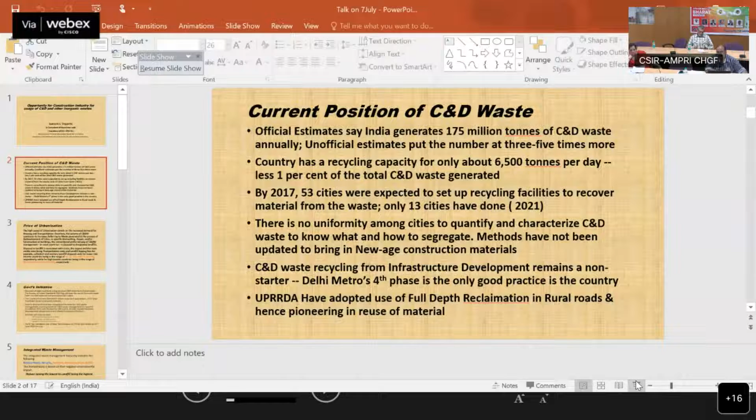Please stop your share of that presentation and share it again. Okay. And now put it in slideshow mode, sir. Now is it okay? Yes, it's visible. Okay, sorry for the inconvenience.

So I was saying that Delhi Metro has been very effectively using this C&D waste. Now in UP, when we come to rural development, this authority has used full depth reclamation in the rural roads, pioneering the reuse of material.

Now, as a price of urbanization, when you are urbanizing a city, there is a lot of dismantling going on, redevelopment of cities, repairs and other things going on. And most of it is going into designated landfills.

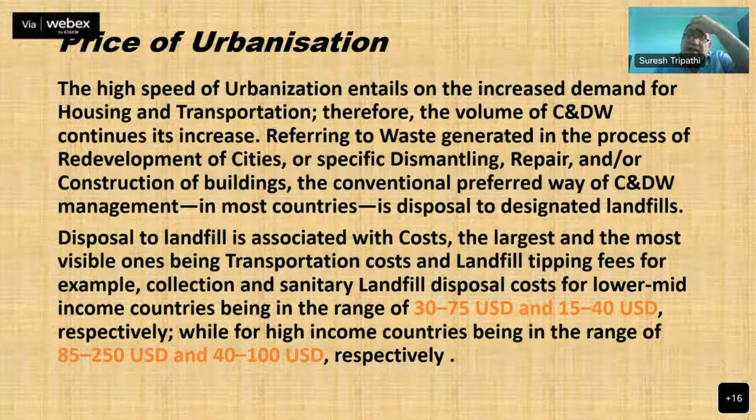The disposal in landfill also has an associated cost. If you see the transportation cost and landfilling tipping, the land itself costs around $75 in low and middle income countries, or around 100 USD in higher income ones.

Coming to government initiatives, earlier there were a lot of hurdles in usage of C&D waste, and the Bureau of Indian Standards has allowed use of concrete from recycled material from C&D waste. But I still find that when it comes to actual implementation, the specifications do not allow use of these...

...C&D waste, and there is a lot of awareness which has to be created among all the stakeholders for use of this C&D waste.

Swachh Bharat Abhiyan has also recognized C&D waste, and in the Swachh Sarvekshan, cities have already specified how C&D waste will be collected and notified.

Another thing is that NHAI has also mandated use of new technologies like cement treated base for around 10% length, in a 2nd June 2022 circular.

So at the government level, a lot of initiatives are being taken, and this initiative is also on the same line as AMPRI.

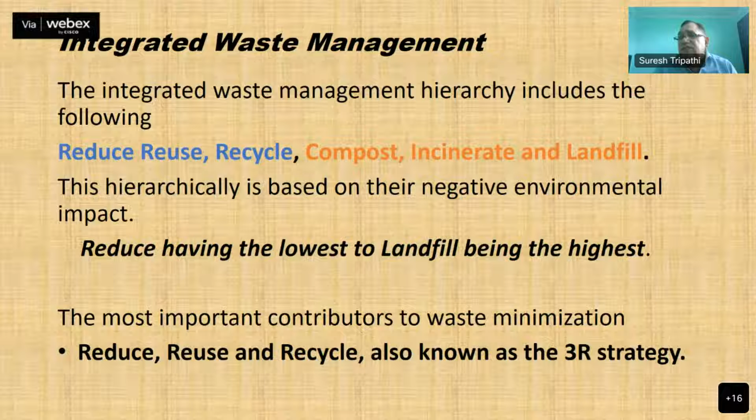Reducing has the lowest negative impact, and landfill has the highest negative impact to the environment. The most important contributors to waste minimization are reduce, reuse, recycle. This is called 3R strategy, which in the construction industry should be made mandatory.

Now, when you look into typical construction companies' waste composition, you will find that there is 60% potentially reusable/recyclable material which is inert material, non-inert waste is around 35%, and only 5% normally needs to be disposed to landfill.

Inert waste in this context specifically refers to physical material or items that are not undergoing any significant physical, chemical, or biological transformation, but not including any hazardous or green material.

Although 95% of C&D waste is potentially reusable, most of it currently goes into landfill, especially the high quality inert waste, which is more than half of the generated waste, indicating great potential for reuse. Understanding this would eventually not only reduce the cost of C&D management, but also contribute to construction company revenue and increased reputation.

Now, an opportunity to practice based on the reduce strategy. If your first goal is reducing, the best way to reduce waste is not to produce it in the first place, so ideally this starts at the design stage itself. The case history of many projects shows that improper design has led to a lot of waste generation and excessive cutoff. The design stage usually requires a comprehensive, conscious, and innovative approach.

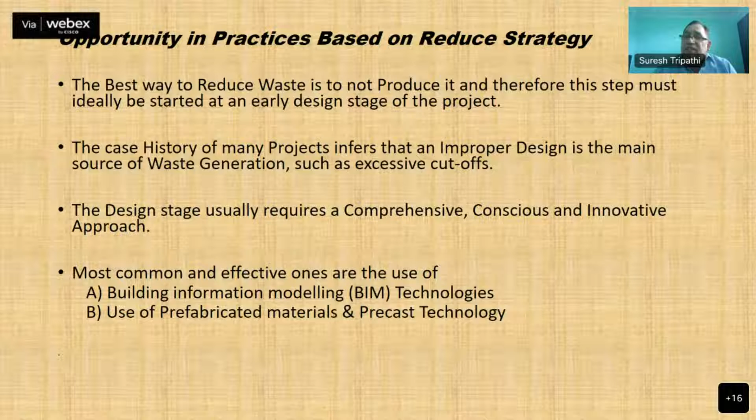One of the most common and effective methods is adopting Building Information Modelling technology, that is BIM technologies, and the next is use of prefabricated or precast technology. Based on my experience, especially since I've been in the precast field for the last 10 years, we have been adopting BIM from the design stage itself.

BIM technologies comprise the digital modeling of the building, containing all technicalities - geometric, quantity, character - and material functions like scheduling, cost, and resources. If we mandate the construction industry to adopt BIM technologies, that will significantly reduce our waste. Also, these days for steel, we are getting pre-cut steel available from the manufacturers, which also reduces wastage.

There is a study which has shown that through use of BIM technologies, we can reduce waste by around 15%.

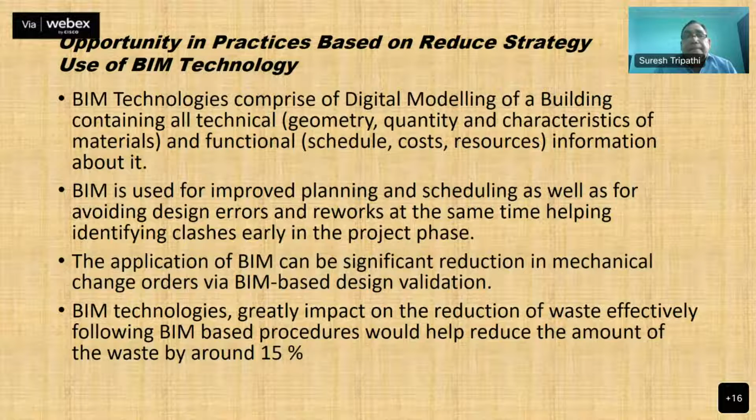Now, taking into consideration prefab and precast technologies for the construction industry, adopting prefabricated material of construction, known as IBS, involves material manufactured off-site. Compared to the conventional use of raw material for on-site component production, fabrication in factories leads to a considerable reduction in losses.

I have been managing a lot of precast factories, and there we absolutely don't allow any wastage. We also recycle all the waste that comes out - aggregate, we crush it up and reuse it. We use up to around 1% of all the waste and reuse it into the concrete.

When you look at prefabricated material, there are precast buildings, precast facades, staircases, partitions, bathroom pods, balconies, and PT slabs, hollow core - all these are components and other building materials.

The government has also mandated that around 15%, especially in road construction, the precast technology should be propagated. The quantitative advantage of using prefabricated material has been studied, and it has been estimated that it replaces around 70% of the finishing work on site, reduces waste associated with timber by around 74 to 87%, and waste associated with concrete by around 50%.

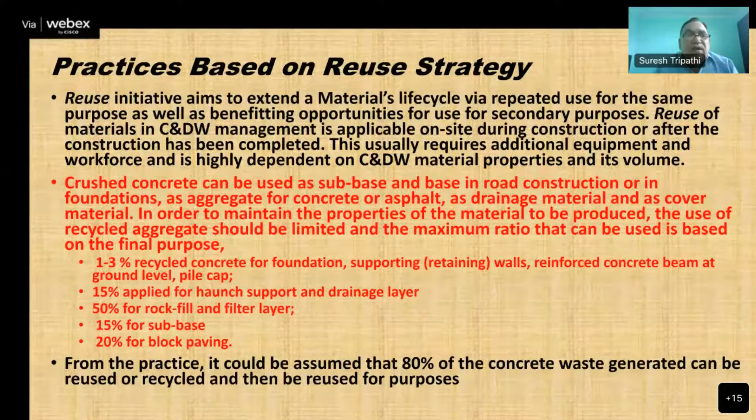Crushed concrete can be used as sub-base for road construction, and as aggregates for concrete or asphalt, or as a drainage material. It has been seen that around 1 to 3% recycled concrete can be used in the foundation, retaining wall, reinforced concrete beam, ground level, and pile cap.

Around 15% can be applied in haunch and drainage layer, 50% in rock fill and filter layer, 15% in sub-base, and 20% in block paving. From practice, it can be assumed that around 80% of the concrete waste generated can be reused or recycled for these purposes.

Now, these days we have also brought in a new technology for innovative use, in which we stabilize soil or waste material having more silica content. We stabilize that using Novocrete. Novocrete is also an additive which is used in ordinary cement.

This is a non-toxic, non-detrimental, environment-friendly material, and it is an innovative way of making roads, yards, hard stands, and stabilizing using existing soil, without excavation and disposal, soil replacement, recycled aggregate, or even asphalt or concrete. This technology is very useful for road, rail, yard, or hard stand area construction.

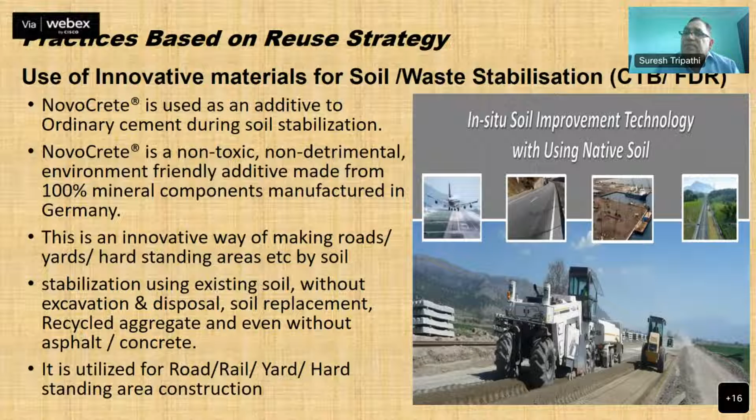Now in UP, a lot of rural roads are being upgraded, and the same material which is there in the road is being recycled and used there itself, so no further additional material is brought from outside. UP has been a pioneer in adopting that technology, and this is to be scaled up and taken all over India. And again, this is Novocrete.

It is mixed with soil, and you can just see when you compare the thing, in normal conventional methods you have to go a minimum of around 80 centimeter depth, and with Novocrete, around one-third of that, you can do the reclaiming.

Now, on the basis of reuse strategy, the gypsum drywalls which are coming up also have a lot of alternative uses. This can be recycled and used effectively as a compost additive for materials with low levels of sulfur and calcium nutrition. Gypsum increases the level of calcium in compost and helps in neutralizing the acidity that might be present in the compost mixture.

So using gypsum as an additive requires a higher need of effective monitoring.

Actually, all these technologies which are being used, like the soils, this Novocrete, or this gypsum, require a lot of knowledge about how the soil is behaving, geotechnical knowledge, and how the material will be reacting. So this also paves the way for new generation scientists who can do research and reduce the quantity of usage and effectively use these technologies.

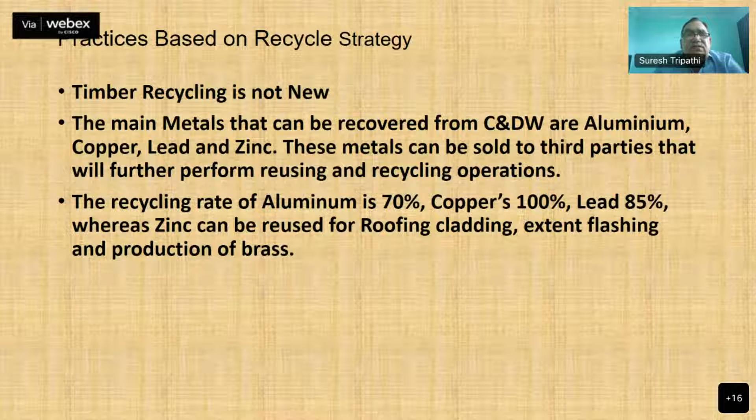And recycling is a popular one, which I don't want to elaborate on much here, because our main theme is usage. So timber recycling, metal has been recycled.

So for me, I just want to say that this initiative of AMPRI is very good, and we'll be listening to others. And I hope that my brief experience of the construction industry and the utilization we are doing will be helpful for the others. Thank you very much. If any question is there, I can answer that.

Yeah, I will have some. Thanks, Tripathi sir, for giving an elaborated talk on these particular opportunities for construction industries for use of C&D and other inorganic waste. I have some questions. Maybe Dr. Ashokan, if you permit, is having some questions. Yeah, you can unshare your presentation, sir. That's fine. Yeah, thank you very much, sir.

Thank you very much for your very exciting information about the C&D waste. Actually, C&D waste is going to be a future challenge to a country like India, and it is a great learning for us. When we were estimating the quantity, almost 175 million tons of C&D waste is generated in India. When we consider the total waste itself, about 1 billion tons, organic waste may be about 50%, and inorganic waste the remaining 50%. Even the municipal solid waste itself looks lower than the construction and demolition waste in the country.

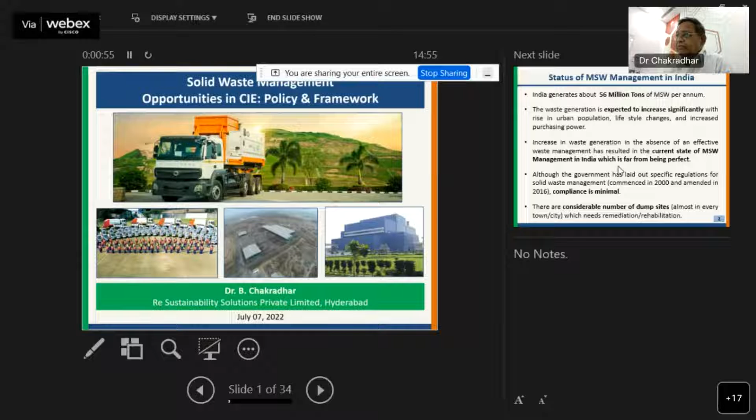The topic is solid waste management opportunities in civil infrastructure, engineering, policy and framework. This is one of the very important areas. If you see these photographs and pictures I've kept, all these activities really badly need civil engineering infrastructure as well as engineers. Without them, we absolutely cannot move forward at all.

I kept this to give a glimpse of what is happening in our country today with solid waste. Around 56 million tons of MSW is expected to be generated, and in subsequent slides you'll see only 36% of treatment is going on, around 65-70% is yet to be done. There are certain policy guidelines - although the government laid out specific regulations for solid waste management commencing in 2000 and subsequently amended 5 years back in 2016, the compliance is minimal. This is one of the toughest topics in the country in waste management.

When you compare with hazardous waste, biomedical waste, or recycling, municipal solid waste is one of the toughest because it is mainly handled by the municipal corporations in each part of this country.

If you see the statistics, our country generates around 1.5 lakh tons per day. For the collection part, we can say 98.4% collection, but the treatment part is only 36%. So you can see the gap. Here itself the importance of civil infrastructure and engineers really shows - there is enormous, endless need, because to cope up the backlog, the number of infrastructure facilities needed in this country is unbelievable. So the topic you people have selected is of top priority today, looking at just one area - waste management of municipal solid waste.

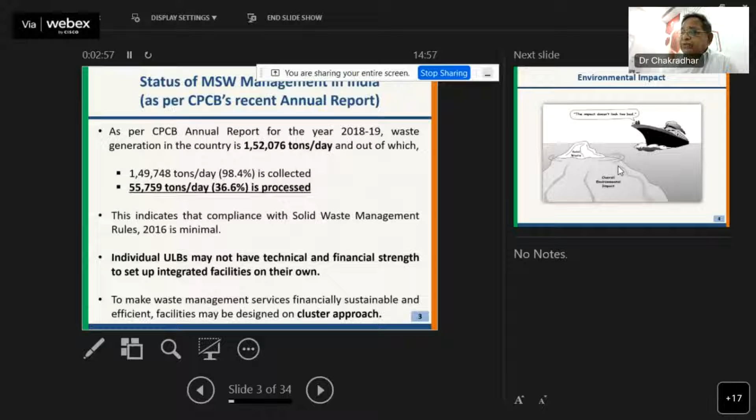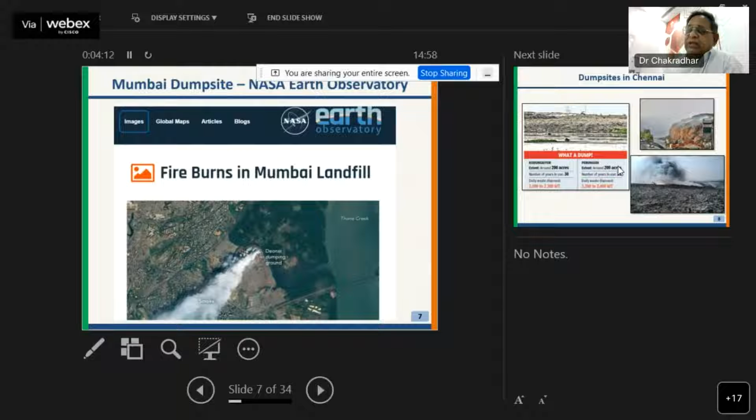This is again a dump site in Deonar, one of the oldest dump sites near Mumbai. What is the real scenario happening? Nearly since 1930 this dump site has been active, and even till now it is active. Recently Ramki has taken up the project of waste to energy here, wanting to establish around an 8 megawatt power plant, for which Mumbai Corporation is working on it.

If you see Chennai, similar scenario - the quantities are enormous, 2,100 to 2,300 metric tons at Kodungaiyur, 2,200 to 2,400 at Perungudi. So the level of lack of civil infrastructure we presently have - well, we do have certain level of things, it's not that we are at zero level. We have definitely improved upon this over the last couple of decades. As soon as in the year 2000, municipal guidelines came, things started initiating, and to some extent we reached a certain level.

But the present scenario is, after looking at how things are happening in the country, what is the need based today? If you see the Rewa level of Madhya Pradesh also, where we are again putting up a waste to energy plant, which will be shortly initiated and activities are already going on - imagine the importance of civil infrastructure and engineers in what you are all discussing. Plenty of scope is available, and endless requirements are needed in this country.

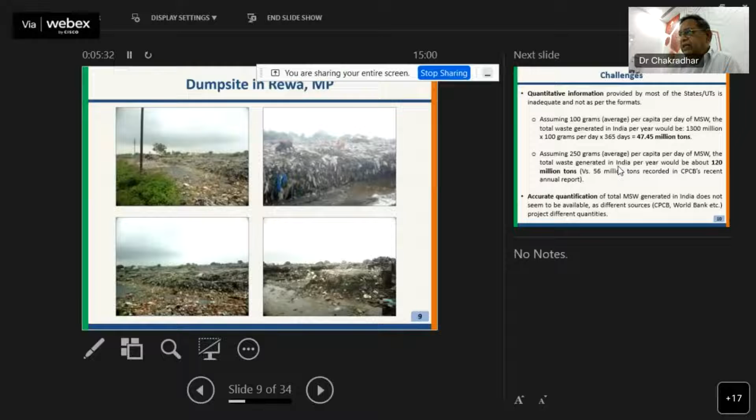If you see the quantitative information, assuming around 100 grams on average per person in the country, we will be generating around 47.45 million tons in a year. If you see 250 grams on average, it goes to around 120 million tons. So the quantification itself is one of the major constraints in our country.

You have CPCB inventorization, you have World Bank inventorization, you have many organizations' inventorizations wherein various types of tonnage will come. But ultimately it's huge, nobody can say exactly on that.

The challenges we are expecting, CPCB observes that most of the dump sites are unscientific. Of course, there's no need of declaring it unscientific, it is 100% unscientific. That's the basic rule. Recent development has come in 2016 with certain modifications.

So landfill sites should preferably be used only for depositing inert material. In fact, new technologies, new opportunities have come today - earlier it was only a dump site, there was no other technology available. That means I'm talking about a decade back or two decades back.

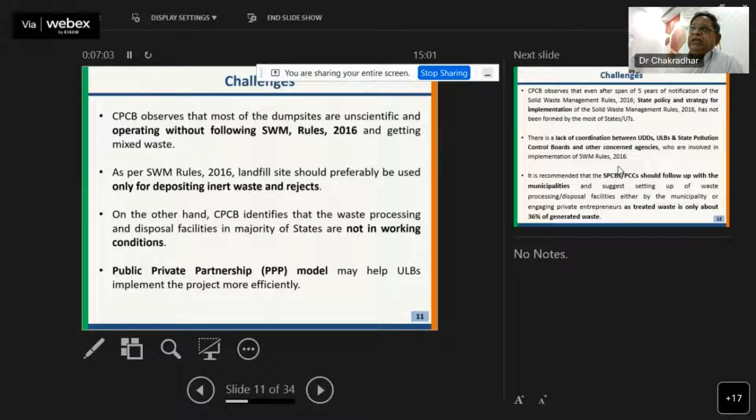But presently many opportunities have come. Public-private partnerships have entered the picture and started entering into new methodologies, which bring different challenges - how exactly in state policy strategies, then lack of coordination between UDD and ULB, state pollution control boards, leads to this sort of situation present.

If you see the last line, treated waste is only about 36% of generated waste. So I just initially mentioned about 36% treatment. So the rest needs enormous infrastructure today, for which the designs, the brainwork of all civil engineers are badly needed. In fact, the recommendations we generally support - site selection is one of the major criteria.

Fundamentally, state policy should support financial issues. Segregation of waste at source, of course this is a fundamental notion from the beginning of waste management rules - segregation at source. But still today, the achievement on this is a real question mark, because we have multi-layers of population, multi-layers of quality of people. So this segregation part is always one of the biggest challenges in our country.

The state UDD should ensure safe disposal of legacy municipal solid waste, because plenty of dump sites are still existing, as I showed in some of the photographs. So one has to convert all these dump sites to treatment facilities. Then only we can really start thinking further.

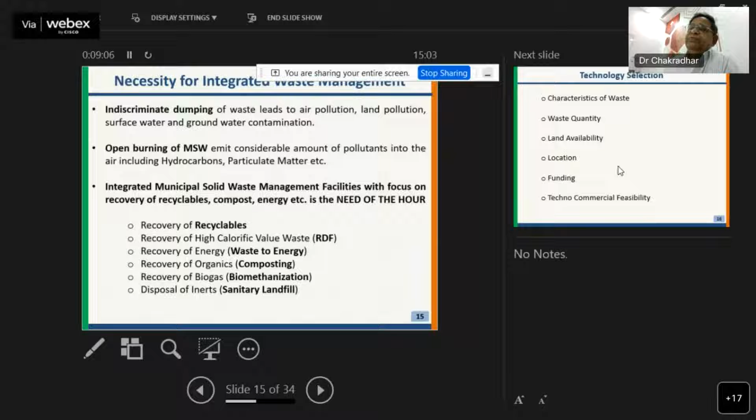That's the basic reason the integrated municipal solid waste management concept has come, which basically covers recovery of recyclables, recovery of RDF - that is refuse derived fuel - waste to energy concept, composting, bio-methanization, sanitary landfills. These concepts are practiced in the country in many areas. It's not that we are not practicing, but there is a lot of improvement needed at each and every level.

In fact, technology selection is one of the criteria where characteristics of the waste, quantity, land availability, location, funding, techno-commercial feasibilities are the basic parameters under technology selection criteria. If you see the collection and transportation, one of the biggest challenges in each aspect - the role of civil engineers and the infrastructure is enormous here.

How exactly the commercial establishments, industrial markets take it, what is the transport mechanism, how exactly it will be segregated, how exactly it will be collected - street sweeping, mechanical sweeping, as well as local transfer stations - is one of the major criteria in urbanized cities. Because you cannot directly take it to long distance dumping sites, wherein local transfer stations will be the easiest way of collecting local municipal solid waste and subsequently transferring it to the dump sites. So this is one collection and transportation mechanism.

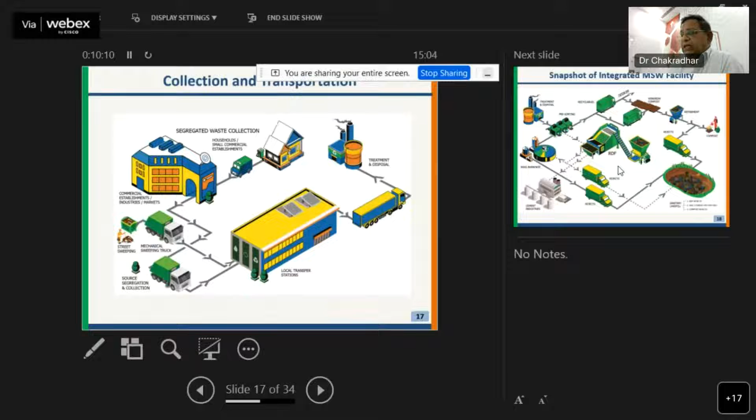Then the MSW facility itself - if you go for MSW facilities, many facilities are needed, this is the concept presently we are adopting. The technology, the methodology adopted is shown here at various levels, and ultimately all the inerts which are segregated go to the landfill. So that is a sanitary landfill site.

Then you have compost mechanism, you have RDF technology we will be making, then mass burn technology for energy. So ultimately rejects, as I mentioned - today RDF is one of the fuels. After preparing RDF with high calorific value, it is today used for waste to energy as well as cement industries. These technology selections, of course, are all the technical things available.

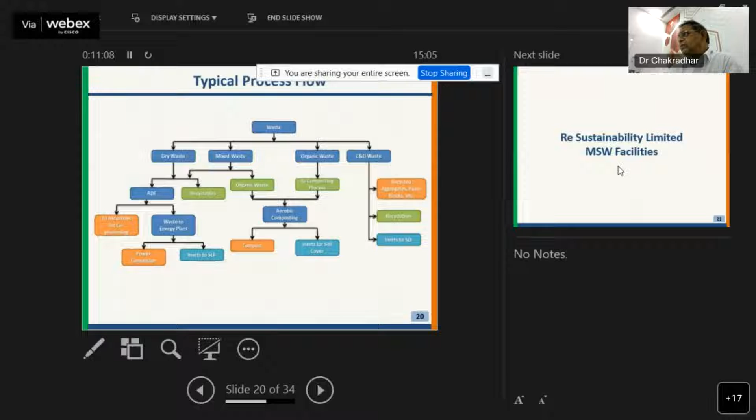Old process flow sheet, as I just showed, I don't want to repeat it again.

Now if you see Hyderabad, one of the key things - around 6,000 to 7,000 tons per day is treated in this location. One of the largest municipal solid waste facilities in the country, I can surely say, because even Delhi, Mumbai, Chennai, Bangalore are all up to the level of 2,000 to 3,000 at multiple stages. But here in Hyderabad, it is only one location, almost covering 6,000 to 7,000 tons.

So this is the facility from a bird's-eye view, what we are making. You see the past site, how exactly it was previously the dump site. After Ramki took up this facility, the change within a decade period shows how the uncontrolled level became a controllable concept. So the present scenario is the bottom one, which is happening.

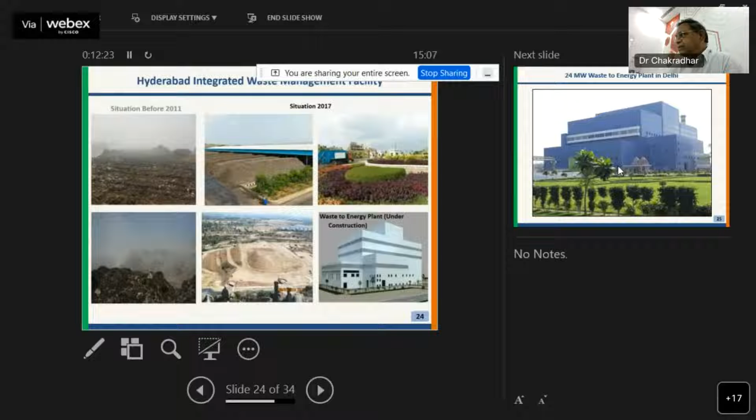If you see the waste facility with all the structures, the entire legacy dump site is totally covered with various technologies. A waste-to-energy plant is also presently working in Hyderabad. This is the Delhi plant, 24 megawatt, presently working, and in Hyderabad also a similar thing is under operation.

So this is the waste-to-energy plant, of course, showing how exactly we convert through mass burn technology, and all the inerts go to the landfill. This is one of the methodologies. As I told, these are the opportunities of MSW.

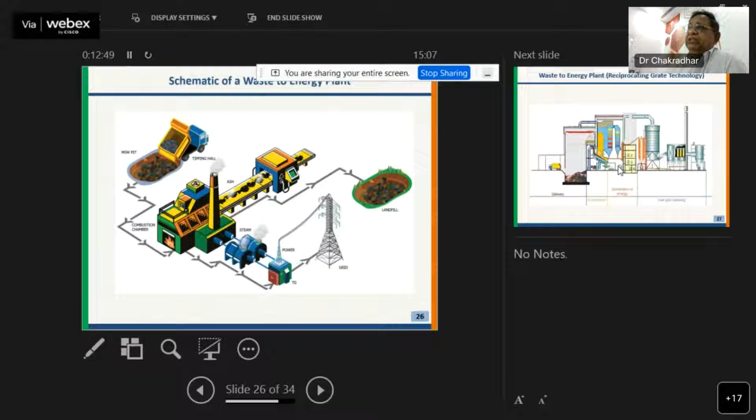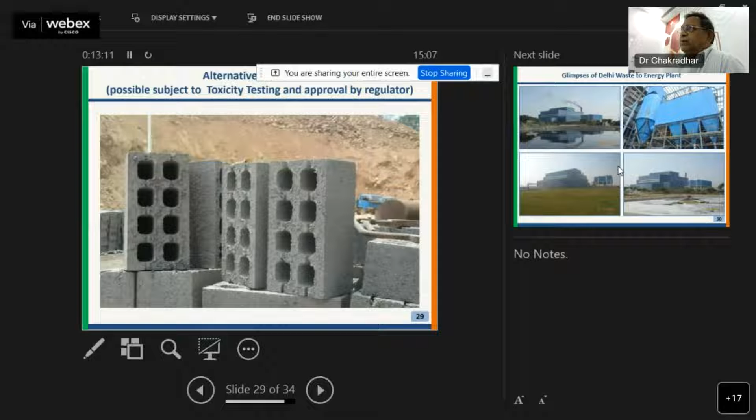If you see this technology and the energy plant, what we have presently working in different places. Now the alternate uses of ash, whatever ash is generated, this is not a new thing, but it is available. So there is an opportunity with the bottom ash which is coming from the power plants.

Now this is the energy plant I showed you, showing how it is working and what type and majority of the MSW directly goes into this particular process. So it reduces the land requirement as well as reduces the landfill area. These are all the different glimpses of the Delhi waste energy plant, how exactly we operate.

So the key to all this success, whatever we are presently talking about, definitely lies with civil infrastructure as well as engineers. The concept of CIE, what you people are making, is really a masterpiece. As per my knowledge, since working in this company for more than 15 years in Ramki, I have seen the importance of civil infrastructure in converting waste management into really usable things. This is the conclusion.

I don't want to go into the details, but 100% collection, 100% processing, disposal as per the rules and guidelines. If you really approach all these guidelines, definitely one day we will reach Swachh Bharat Mission's targets, along with all the inputs from various sectors, engineers, as well as the scientific community coming into this.

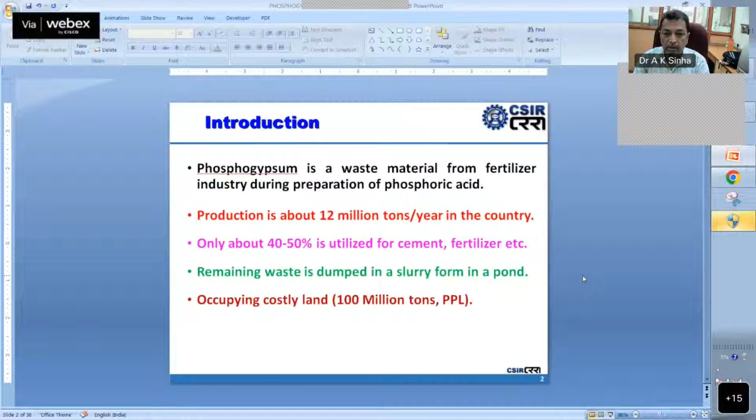May I request Dr. Sinha, sir, your slides are not moving. It is not moving. Yes, only the first slide we could see, not the second one. Just unshare and share your presentation again. Okay. It is moving. It is moving. Yes, yes, it is moving.

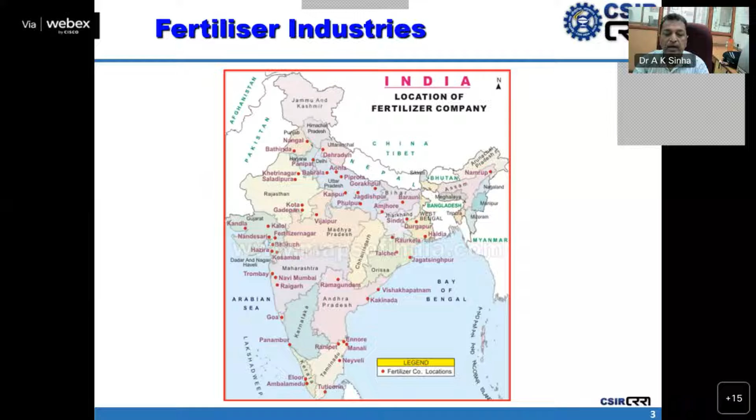It is from phosphogypsum fertilizer industries, and you will see around 50% is utilized in different industries by cement or fertilizer industry. And the remaining 50% is deposited in different ponds in slurry form by the respective producing industries. Fertilizer industry is located all over India on a pan-India basis, meaning phosphogypsum waste material is being generated all over the country. Considering that, a study was carried out, and phosphogypsum, a waste material, has potential for application in road construction, but even basic research is not carried out in India or abroad, and due to that a study was carried out.

So before application of phosphogypsum waste materials, certain challenges are there. For particular application in road construction, first the material should be accredited by IRC, and this material is not till date accredited by the IRC. There are no guidelines, no construction methodology available, lack of skill, and even engineering properties we are not certain how it will behave. Considering that, a study was carried out.

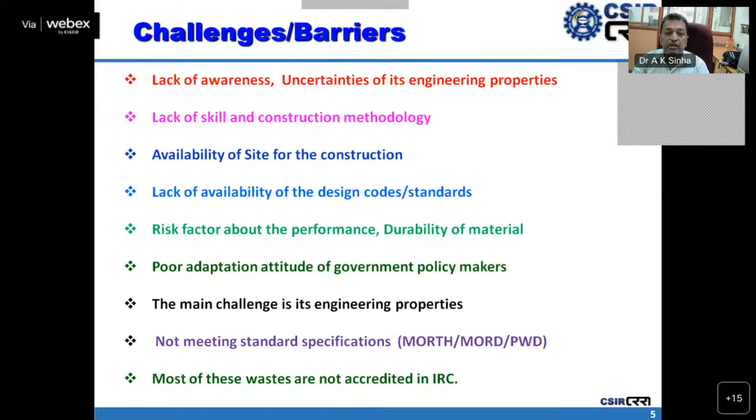So a sequence of studies, step by step, was carried out to know the hazardous nature of the phosphogypsum waste material. Chemical analysis was carried out, and it was found that it is a non-hazardous material. Then in the forward direction, engineering properties were determined as per the requirement of road construction and standard specification. After meeting the engineering properties and preparation of reports, accreditation was taken from the Indian Roads Congress. After taking accreditation of these materials, a pilot study using phosphogypsum in the construction of road performance study was carried out. A 3-year performance study was carried out, and based on that, guideline preparation is in progress by IRC with the help of CRRI.

Phosphogypsum was studied in the construction of embankment layer, subgrade layer, and subbase layer as a replacement of soil or aggregate, without mixing or blending with other additive materials like soil or chemicals like cement or lime. So, alone.

Phosphogypsum studies for application in different layers of road construction. As per the requirement of Ministry Guidelines or Indian Roads Congress Associations, for embankment construction these properties are required. For subgrade construction, properties like liquid limit, plastic limit, density, free-swelling index, shear strength parameters should meet Ministry guidelines for embankment, subgrade, and subbase layers.

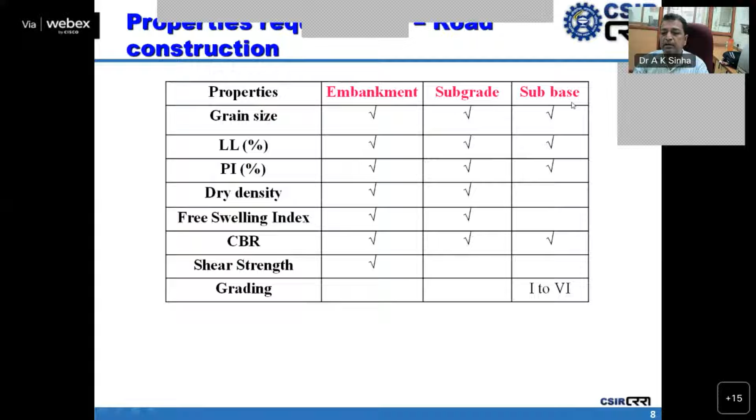The whole methodology was carried out in two stages. First, laboratory study was carried out, and based on laboratory results of physical, chemical, or geotechnical characterization, design stability of the embankments was carried out. After getting a stable embankment, field study was carried out using phosphogypsum layers, and 3 years performance monitoring was conducted.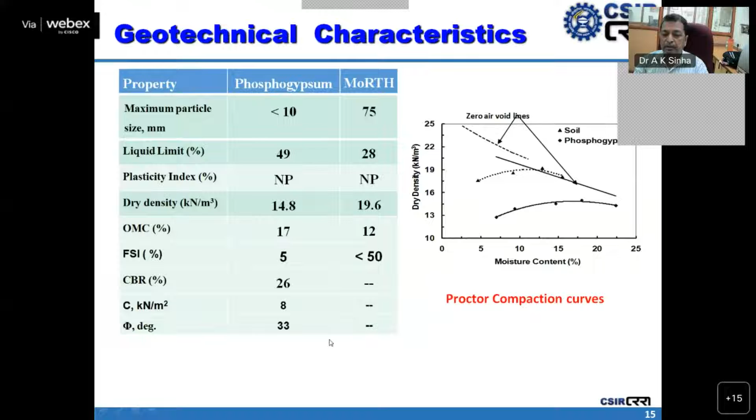Based on laboratory studies, a pilot study was carried out at Paradeep, Odisha. 5 sections were made, constructed using phosphogypsum.

The first one is the control section, constructed as usual using conventional soil and aggregate materials. In the second and third, phosphogypsum was used as the only embankment material, with the rest of the layers constructed as usual conventional layers. The fourth section was carried out using phosphogypsum as a subgrade material. The fifth section used phosphogypsum as a replacement of aggregate in the granular subbase layer.

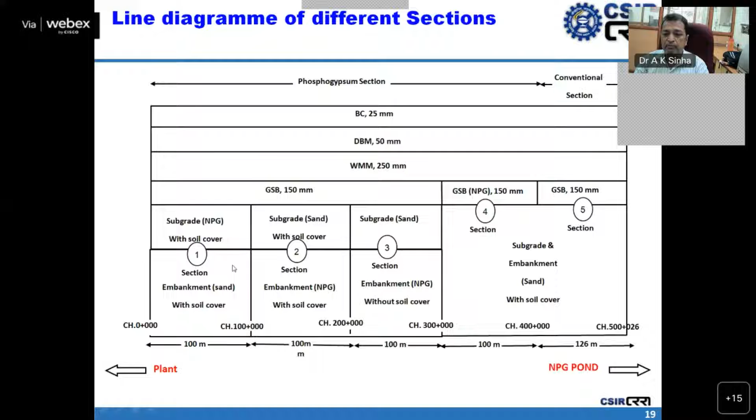This is section 1, 2, 3, 4, 5 where phosphogypsum material was used. This is the conventional section. This is the second one where phosphogypsum was used only in embankments. Here, the embankment slope was covered with locally available soil to know the erodibility of the phosphogypsum material on sloping ground.

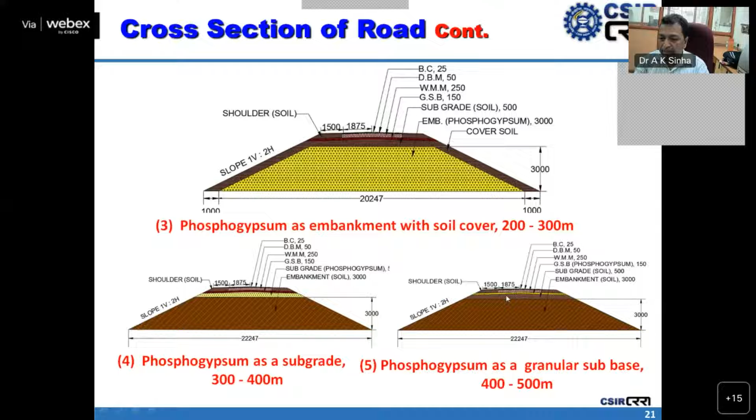Fourth section where phosphogypsum was used in the subgrade layer. Fifth section where phosphogypsum was used only in granular subbase layers. This is a pictorial view of the site where the experimental section was carried out. This is clearing and grubbing.

This is a totally waterlogged area and marshy land. Clearing and grubbing was also very difficult to do. During that time, the working platform was made, and then the whole alignment was constructed.

After working platform construction, the phosphogypsum was spread and laid there. This is the control section - laying and compaction of the control section. This is the compacted phosphogypsum layers, and slope cover was also carried out like this.

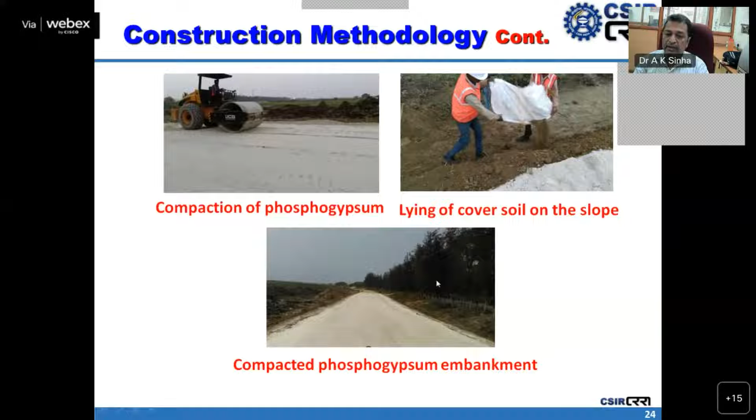This is the pictorial view of the embankment constructed using phosphogypsum, compacted layers. During construction, different parameters like density, settlement, and CBR test were carried out, and modulus, settlement parameters, and field CBR were also carried out using DCPT equipment.

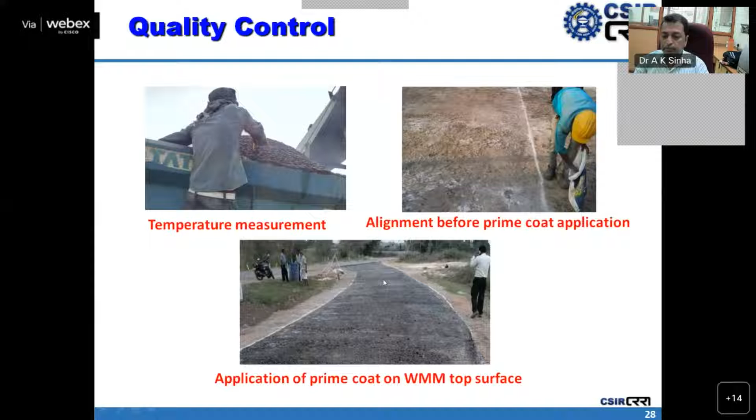For the higher bituminous layers, quality control was done at the plant - hot mix plant, alignment. This is the pictorial view of the proposed road alignment, and during construction, temperature, thickness, and other parameters were measured. This is the pictorial view of the finished experimental test section using phosphogypsum.

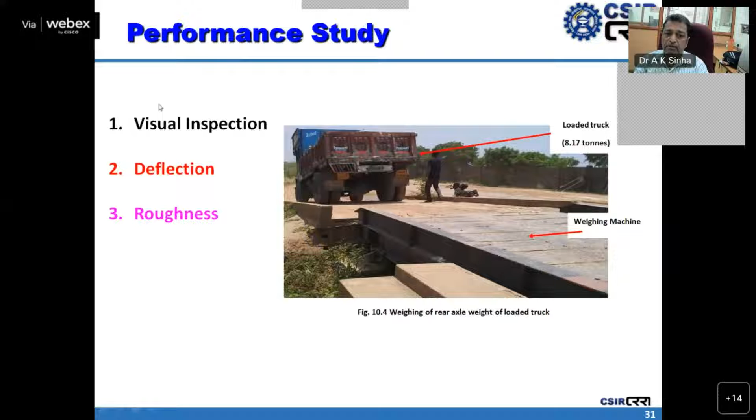This is the details of the project which was carried out under the supervision of CSIR-CRRI. 3 years performance monitoring was carried out using different equipment for deflection parameter, roughness, and visual inspection. This is the pictorial view of the measurement of deflection under the right wheel path and left wheel path, and roughness measurement using dipstick on the right and left wheel paths.

It was found that all sections' rebound deflection is comparable to the conventional section. Similarly, the roughness was also obtained, comparable to the conventional section.

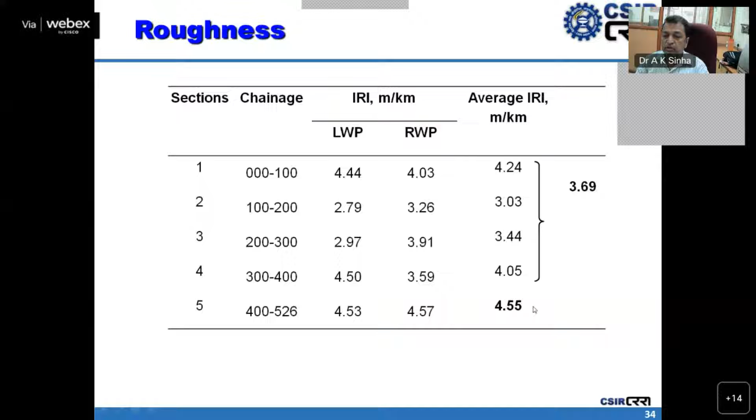From this, we can say that the behavior of phosphogypsum as an embankment material, subgrade material, or granular subbase material is good - or we can say it performs better than conventional sections. The roughness parameter is less than the conventional section, rebound deflection is also less, and modulus and CBR values obtained from the experimental section are more than the conventional section.

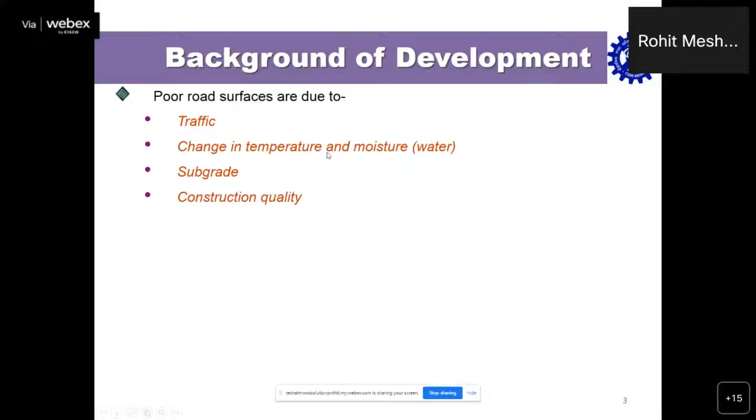However, over the years, heavy traffic and changes in climate degrade the road surfaces, which results in potholes and uneven surfaces, broken roads, and cracking, which certainly causes accidents on the roads. Nowadays the roads are not black but gray, as concrete roads are more popular nowadays. These are made up of cement, aggregates, and sand.

Joseph Aspdin discovered Portland cement in 1824. The reason for the use of concrete in place of asphalt is the longevity, which is around 20 to 40 years on average. It is also 2 to 4 times higher than the lifespan of asphalt, and also the recyclability, as concrete can be recycled, meaning it can be used as an aggregate again for the next cycle, and the hold-up is better for concrete roads under weight and pressure conditions.

However, there are some disadvantages, and the main one is the cost of the concrete, and the second one is that repairing is the big problem with this concrete road. So these disadvantages can be catered to using geopolymers, and Joseph Davidovits coined the term geopolymers in 1978.

The pyramid blocks are the best example of geopolymers. So geopolymers are inorganic, typically aluminosilicate materials, forming a long range of covalently bonded amorphous networks. They have the properties of fast setting and ambient temperature curing. They are more durable than conventional cement or concrete structures, and they have higher compressive strength as well as tensile strength. And they are produced using waste material and byproducts.

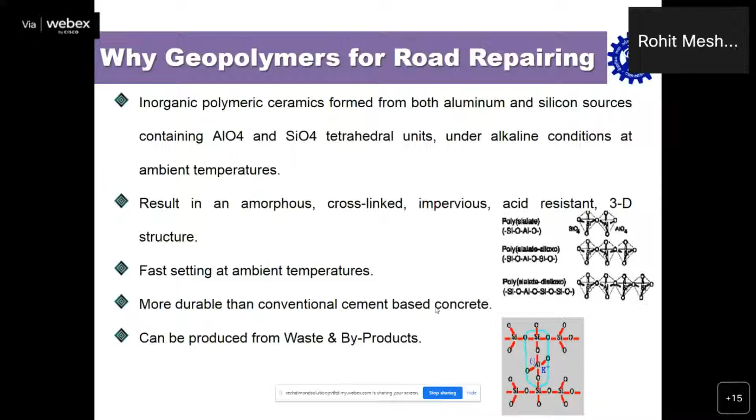So we will look at the fly ash availability. The Indian coal-based thermal power plants are the backbone of power capacity addition in India, and Indian coal has a higher low-grade ash content of around 24 to 63%, as compared to imported coal, which has around 2 to 18% ash content.

The second raw material we are using is slag. It is actually the byproduct generated during pig iron and steel production. It is the major waste generated in the integrated steel plant. It contains calcium, magnesium, manganese, aluminum silicate, and oxide in various combinations, and nearly more than half a ton gets generated for each ton of steel production.

So nearly 24 million tons of blast furnace slag and 12 million tons of steel slag are produced in India annually, and it is expected that blast furnace slag generation may reach up to 45 to 50 million tons, and BOF slag will be generated at around 15 to 20 million tons by year 2030.

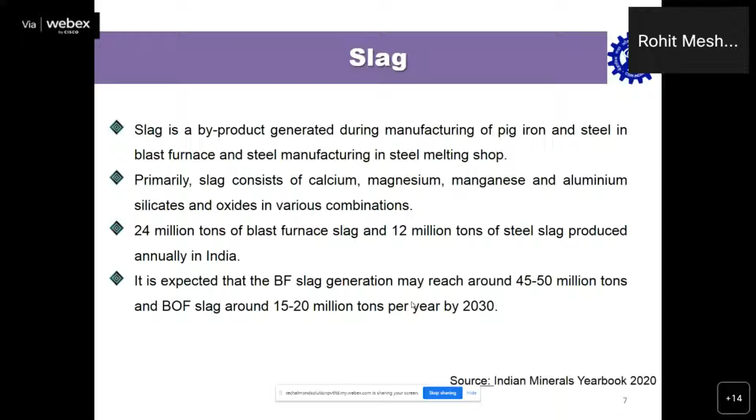The product has different highlights, like it's suitable for roads and other civil structure repairing. It is ready to use and sets instantly. It works in all weather conditions, and the road can be used for light traffic in 6 hours and heavy traffic in 12 hours. It has higher shelf life, and is very environmentally friendly, as we are using only waste material or byproducts. It is also very economical, as fly ash and slag are available from the industry at nominal cost—for fly ash, only the transportation cost is considered.

So we have developed two products based on their setting times: one sets at a minimum of 40 minutes, that is quick set, and another sets within 30 minutes, that is ultra quick set. The compressive strength after 28 days is as per ASTM standard, and we have not found any shrinkage. The workability for this material is within 15 to 30 minutes, so it sets very fast.

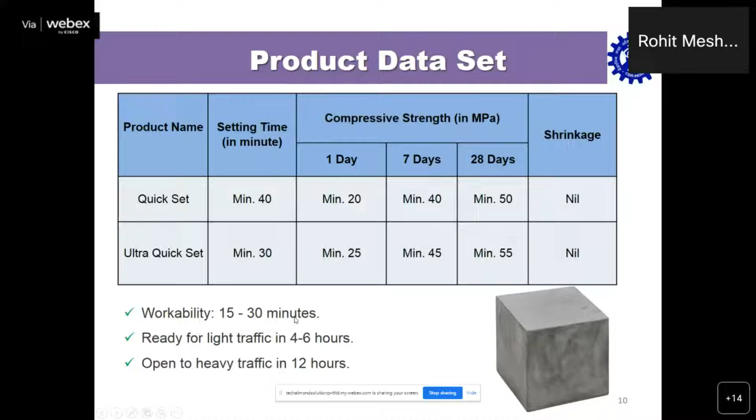We have also done a product comparison with market available products like from BASF and Pidilite Industries, and we found that it is much cheaper, like around 50% to one third of the available products, as all are imported products. So it will be an import substitution for quick repairing material.

We have done the techno-economics for a 1 ton per day powder production. I'm not putting all the exact values, but the ranges are mentioned for the idea, and we have calculated the production cost after including GST—it is around 7,200 per ton. Based on this, the recovery on investment is only nearly 4 years, which is acceptable—below 5 years is acceptable in the industry.

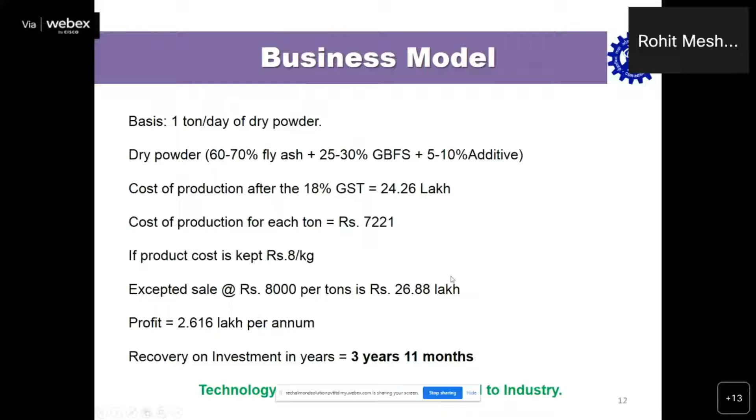This technology has been demonstrated and transferred to industry in Hyderabad. There are three advantages for industries: it reduces greenhouse gases—1 ton of cement emits around 870 kg of CO2, whereas for this geopolymer quick repairing material it is around 350 to 400 kg of CO2 per ton, so it is very less. It also helps reserve natural resources like limestone, and the cost is minimum because we are using waste and byproducts.

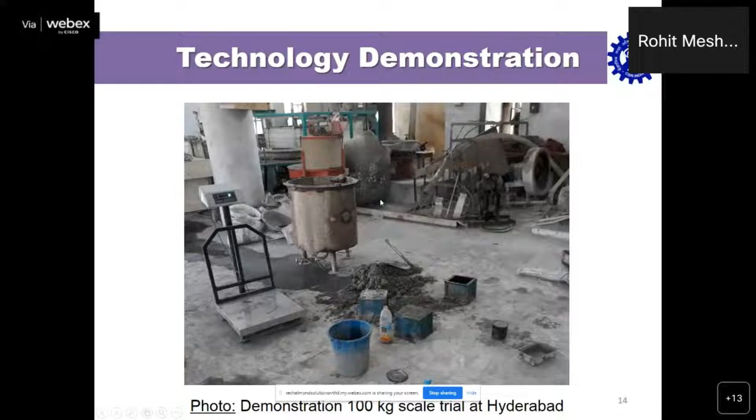This is a photograph of the technology we demonstrated at 100 kg scale at Hyderabad. This is a photograph shared by the client, showing application areas for repairing common defects that occur in roads, and it can also be used for cracks on wall structures.

Thank you. If you have any questions, please ask.

We developed this technology to address the Swachh Bharat mission. We found a massive demand existing in the field, so we developed this technology. The main focus is to develop a technology that is most efficient in cost as well as technology aspects, and also suitable for factory mode of casting and delivering to the field. We also want to concentrate on quality aspects, and we targeted to reduce construction time by at least 90% compared to conventional construction. These are our main aims for developing this technology.

The Swachh Bharat mission is a great vision of our PM for giving toilets to everyone. But there are some quality related issues existing in the field now due to this technology lackiness or lack of awareness.

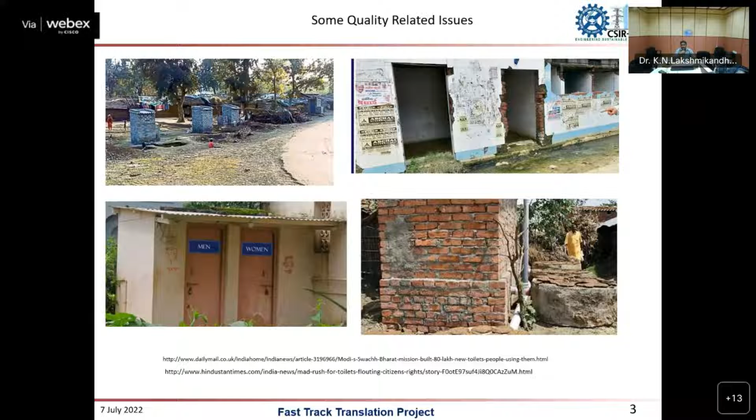We want to consider all aspects concerning implementation as well as usefulness of the technology, aiming for ease of maintenance. Maintenance seems to be a major issue in case of service core units. Ventilation and daylight are prime factors we kept in mind while developing this technology. It should also be suitable for industrialization so that we can produce it at the factory and transfer the technology to the field for installation of minimum cost toilets. We also fixed the size so that access and convenience are not a problem for the user, since it's precast, we fixed the size and everything.

We want this technology to be green and sustainable. For this, we developed a flowable concrete mix. In general practice, ferrocement is the technology we are going to use in this concern. The ferrocement construction involves meshes plastered with mortar, but here we want to develop the technology by casting with concrete. We also want to develop a damp-proof jointing system so that we can install individual components without complications or difficulties. We want to 100% restrict the foundation work, and also restrict plastering. These are some of the foreseen concepts we kept for developing this technology.

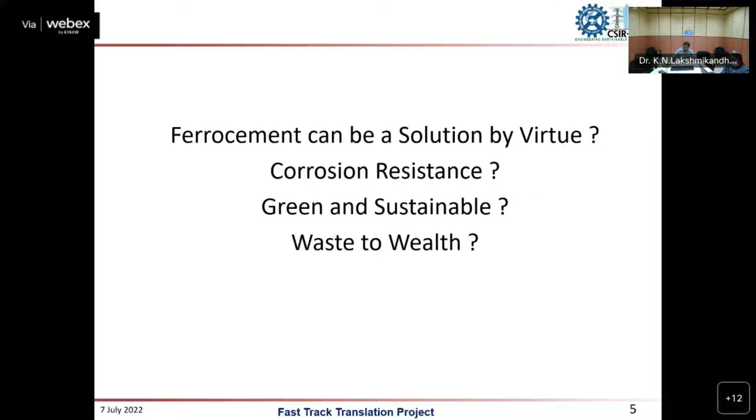So ferrocement is one of the technologies we chose to satisfy all these aims, which is corrosion resistant, green and sustainable. We also want to concentrate on waste to wealth. These are the three compositions we want to use for developing ferrocement for this technology. Ferrocement is very good material in my aspect. Even though it is a composition of finer mesh and cement mortar or concrete, when combining these two, they act together, not separately like in an RC system.

When you see this system, this is a very fine mesh. Because of the fine mesh, the corrosion resistance will be very high compared to other RC structures. Normally the volumetric changes from iron to iron oxides can enlarge sevenfold, that is 7 times the volume.

If you take the diameter of the bar as D, then 70% expansion is expected because of corrosion. This large expansion gives stresses and breaks the concrete, which normally happens with thicker bars. But in ferrocement, we use a very fine mesh, so because of the smaller diameter, whatever expansion tries to happen will be controlled by the tension characteristics of the concrete. So we expect ferrocement to be a good corrosion-resistive material.

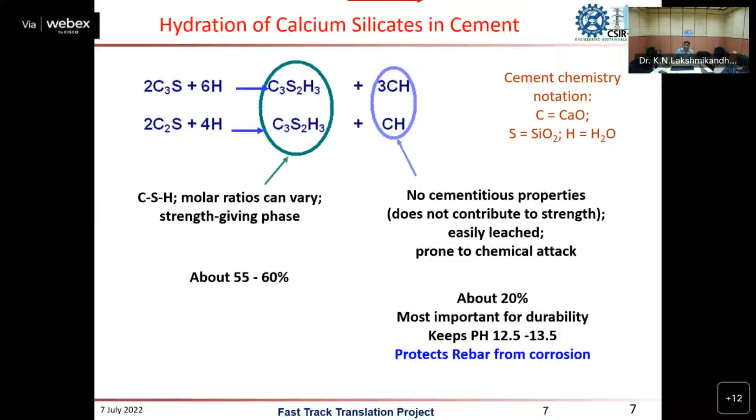Another thing we want to utilize is industrial waste like GGBS or fly ash. This is the basic chemistry behind the concreting process. A CSH gel forms when we add water to cement, and there remains about 20 to 25% calcium hydroxide which is kept idle in the process. This is actually very good for durability aspects, as it keeps the pH between 12.5 and 13.5, restricting the possibility of corrosion. But the quantity required for this is only around 5 to 7% to maintain the pH value.

So the remaining 13% we can effectively utilize for developing better characteristics of the concrete. Here we replace this with pozzolanic material like fly ash or GGBS, industrial waste, which reacts with the calcium hydroxide to form additional CSH gel. This way we effectively utilize waste material to produce better concrete. When you reduce calcium hydroxide to CSH gel, it becomes a non-permeable concrete system, resisting the entry of water, moisture, or air into the concrete medium, giving better durability.

We planned it such that it should be very easy to cast, and should not create any damages during handling. Also, it should be easy to fix and install. So we kept everything in mind and developed the concepts for this technology accordingly.

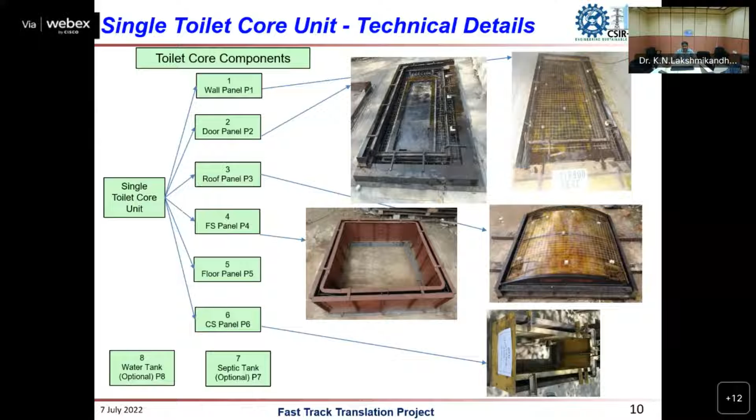We wanted every part to be precast and assembled - that was our main aim. So we made everything in a categorized way: 6 categories for the core service product application, and the remaining 2 are additional add-on products. We programmed and developed this technology as a single, complete-use technology.

We developed the design mixes. Those design mixes should have good flowability, so we developed different trial mixes, and found that 40% replacement of cement gives very better flow characteristics, with no segregation of the cement slurry happening in the mix. So we chose this mix for casting all the products.

The technology we developed also uses tiles. Tiles will be provided before casting, and then casting will be done, so the system will have a tiled surface, giving very good finished surfaces inside, leading to minimum maintenance of the system.

We developed shells for good ventilation and airflow, creating an eddy current into the toilet system, so that the heat from incoming air takes this eddy current action and gets carried up and out. This way we maintain the system so the entire toilet is cooler and daylighted.

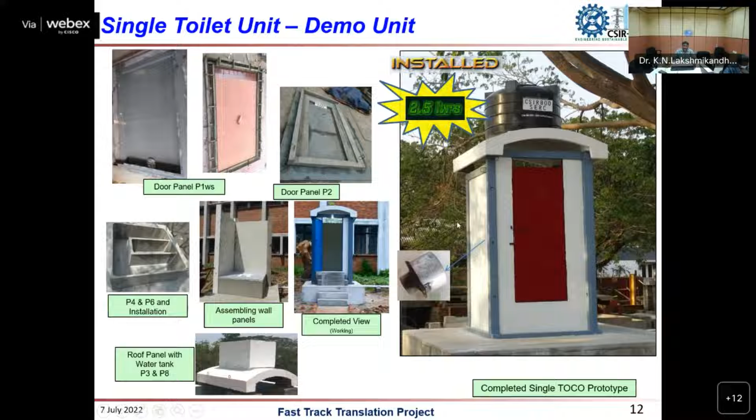Similarly, we want to aim for clusters of toilets for community usage. This is a 2-toilet system shown here, and in a similar way we can expand to 3, 4, or any number of toilets.

We used the same ferrocement technology to develop water tanks as well as septic tanks. For the septic tanks, the concept is that one setup can be used for some time and then closed, while the second one is opened, providing a drying opportunity so that the long-term usage of the entire structure is ensured.

This is the technology we developed having 4 poles - this is the first pole technology we developed. The only problem we were facing is because of the luxuriousness of the entire system, the cost is very, very high compared to the conventionally available system. The toilet we are developing here costs around 22,000 per unit, so we wanted to overcome this.

We further refined it with a final system and tried different options. One option was developing the superstructure system separately and the substructure system separately, so that we could reduce the cost to be competitive with the market.

We also tried different panel thicknesses. One panel consists of 10 mm thickness - just imagine, for a 2.2 meter height wall, it weighs only 108 kg. The second wall we kept at 15 mm, the third at 20 mm, and the fourth at 25 mm. This was constructed to examine whether the expectations regarding durability and corrosion were fulfilled.

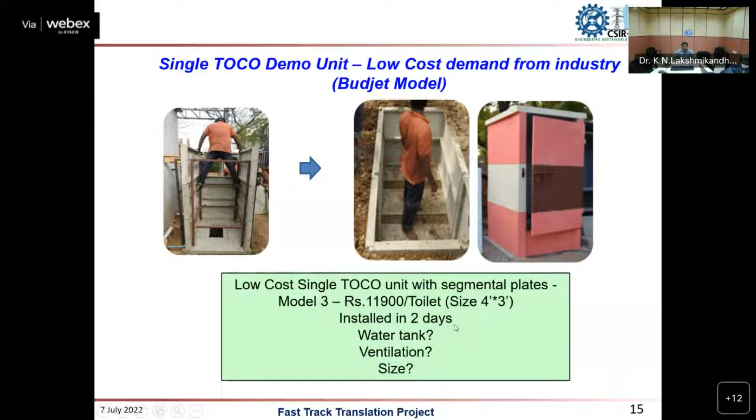We further expanded this technology. This is a typical view of what we demonstrated at TTRS in our Chennai region, which is a tower testing facility for SERC. There we installed 5 units, and of these, 2 units we used as security cabins. This security cabin was installed at the elevated level by carrying panels to that level. This seems to be a good technology.

The only drawback is the weight, which was around 180 kgs. We wanted to reduce this further, so we divided it into a different number of panels. In the 4th version, we developed this technology with a precast foundation system, 4 corner walls with sliding ribs, and cement panels of 20 mm thickness, assembling all these components within a day. So within a day we can complete the structure, and other aspects like painting can be done whenever possible.

This way we were able to control both time and cost. This technology is suitable for both a single service core unit system or a multiple service core unit system, by modifying the ribs which have grooves present in them. The cost is also comparable to the market price - it's 11,900 rupees per unit for a single system, and for a combined system it comes to under 11,500 per unit.

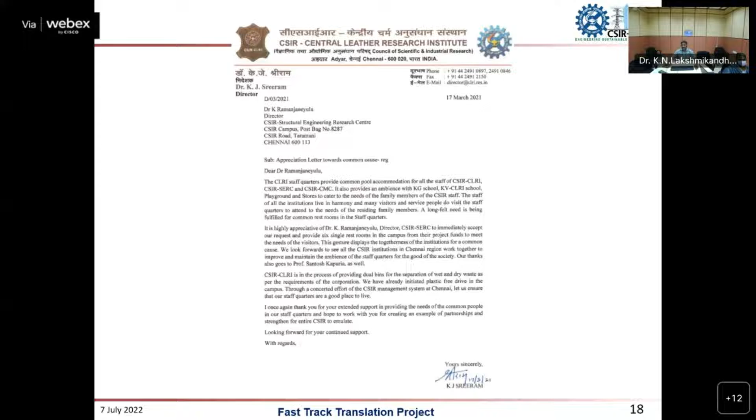He feels that the technology is very good and has excellent potential for the market. We have also transferred the technologies to 3 concerns for demonstration.

So this is about the service core units. Now further, we want to extend this technology for developing housing units, because ferrocement has good structural characteristics, durability and ductility, and whatever may be required for the basic design aspects, it performs very well. So we want to use all this information and the effectiveness of the structural system to develop a housing system which has very good opportunity for implementation.

And we want to use the waste, which we were having as a residue in nature, to be used as a resource for development. This is a basic fundamental study we studied, and found that the ferrocement wall has the capability of carrying whatever load comes to the system, at least for G+2. These are the experiments we did for G+2 structures, and we found it suitable.

But the problem we are facing is the thin system, because at 20mm or 25mm thickness, the wall does not have sufficient thermal or sound insulation. So we kept this in mind, and we further developed this technology by providing one more skin, so that there is an interface between the two skins, and that interface gives good thermal insulation as well as sound insulation. So we further extended this technology.

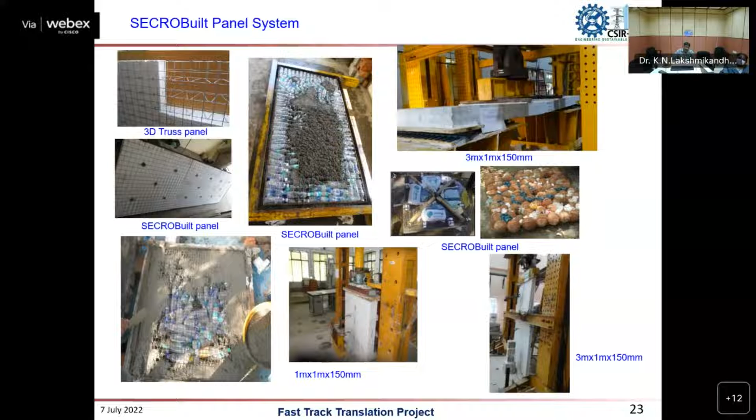So we kept the thickness at 150mm, including 25mm skin at both ends and 100mm thickness of infill. We also developed a model house.

Normally when talking about precast construction, the one-way slab is the most preferred system. But using our SECROBuilt technology, we proved that it is suitable for two-way action. We tested this with 12-point loading, which simulates equal UDL load distribution, and this is the crack pattern. The crack pattern clearly shows a two-way distribution of cracks, which 100% proves this technology is well suited for two-way slab action.

And there is no punching shear because of the 12 points we were loading, so no point is crushed or punched. This shows that the panel's integration and integrity is ensured for load carrying capacity. This is a typical view of the G+1 building we developed using this SECROBuilt technology, and we tested it for lateral seismic load, and found it well suited for even the worst seismic conditions.

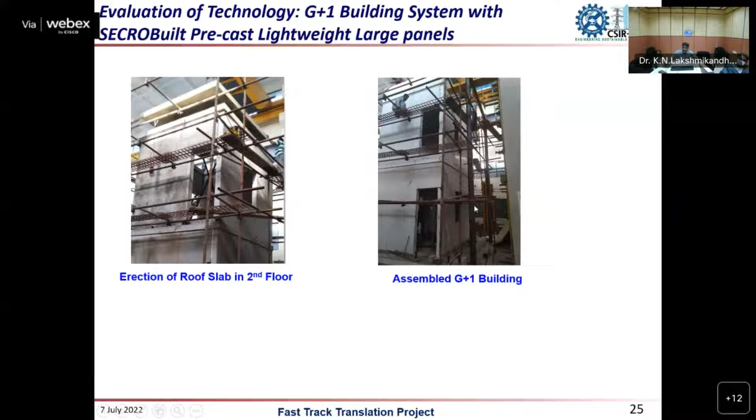Thank you. Any questions, please? This technology is readily available for industrial people - they can take up this technology for their implementation. Thank you.

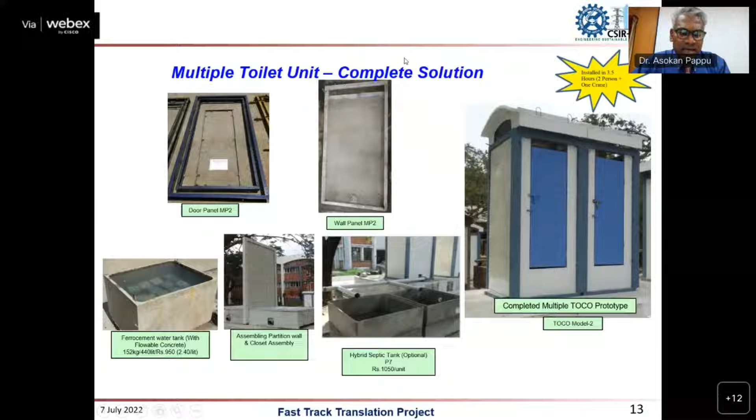Thank you sir. Yes, maybe Dr. Krishnakant, this corrosion behavior, I do not know, maybe you might have studied about the corrosion characteristics, I will contact you separately since time is moving on. I would like to sincerely thank Suresh sir and Dr. Lakshmikandhan for this very interactive session. I am sure these points we have to highlight on 15th of July, when we have a panel discussion. So with this I am finishing my speech, I request the moderator to continue the program. Thank you so much, thank you Dr. Asokan sir.

Thanks Dr. Asokan sir for giving advice for this particular collaborative work. Definitely this particular iConnect will be beneficial to all the presenters as well as participants participating in this prestigious event. Now I'll request Dr. P.S. Ambly, Principal Scientist, CSIR SERC Chennai, to deliver her talk on eco-friendly geopolymer concrete blocks. So Ambly madam, please.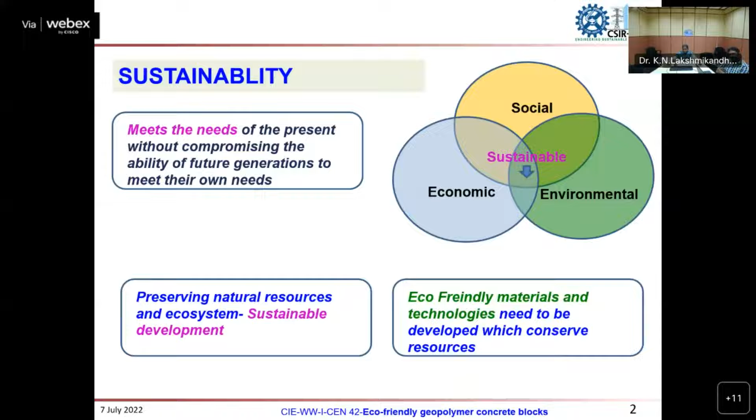Our main focus is development of an eco-friendly material that will conserve natural resources. In any project, when developing a new material, we aim for one that gives low impact to the environment, is energy efficient and water efficient, minimizes waste, and has material efficiency. This will be a material that can give a lot of impact and be highly eco-friendly.

In normal concrete, there are three basic ingredients: binder, aggregate, and water. Over the years there has been a lot of advancement, with new admixtures, both chemical and mineral, being used. Ordinary Portland cement used to be the main binder, but nowadays we rarely see normal Portland cement based concrete because a lot of other supplementary cementitious materials are incorporated. Blended cements have come into use, which can modify both the hydration and other properties of concrete. When using any blended cement based concrete system, or adding chemical or mineral admixtures, careful formulation and optimization can give improved performance, even better than the conventional cement based system.

When you talk about concrete, we all know that it is a sustainable material. How is it sustainable? Because it is recyclable, it will reduce energy consumption, and at the same time it is economical compared to other building materials.

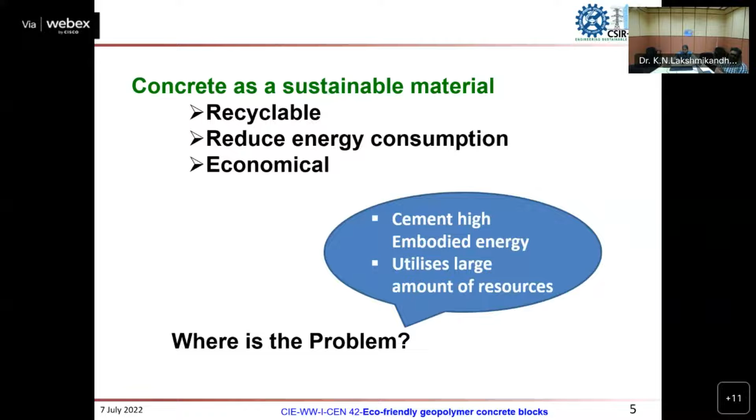But what happened? Where is the problem? Because even though cement has been around for many years since its invention, we are using the cement based system, but cement has high embodied energy involved in its production, and also a lot of natural resources are utilized in the production of cement.

So we are looking for some alternative solution, and one of the solutions is an alternative binder system, which is a geopolymer system. It was proposed by Davidovits in 1978. It is basically an inorganic binder system, aluminosilicate based.

In the case of using geopolymer as binder in concrete systems, previous studies show that it has excellent mechanical and durability properties, and these properties are most of the time similar to conventional Portland cement based systems. At CSIR-SERC, for more than 2 decades, we have been working on geopolymer systems.

There are different source materials which we have utilized for geopolymer. The main advantage is cement is a factory produced material with certain fixed properties that we can alter only by incorporating mineral admixtures or other admixtures. But here, from the source material modification itself, we can get different properties to suit customer requirements. So this geopolymer based technology has become a profitable business.

Depending upon the availability of the source material, the cost will vary. It can come down, or it can slightly go up, or it can be equivalent. And not only the material cost, we have to see the life cycle cost. When developing a technology, and when it comes to application, the life cycle cost has to be considered.

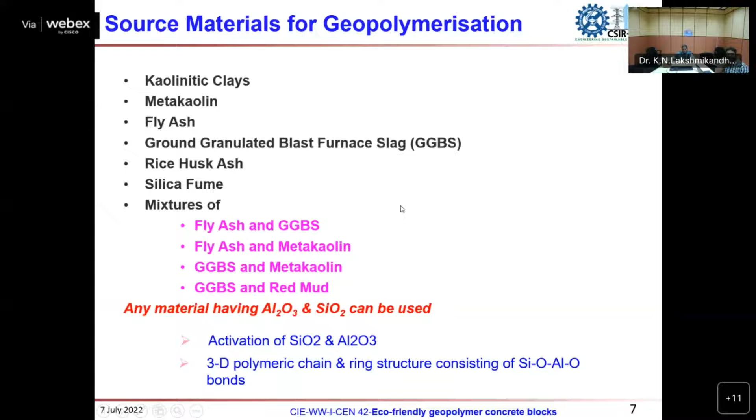There are a lot of materials which we can utilize for geopolymerization, for example fly ash, GGBS, metakaolin, red mud, rice husk ash, etc. We have used many source materials for geopolymer formulation, depending upon the silica to alumina ratio in the source material, and there are different technologies we can make accordingly.

In short, we can say that wherever conventional cement based system is used, there we can utilize geopolymer as a binder, and there are a lot of advantages for this geopolymer concrete.

In other countries... at SERC, we are talking about ambient cured geopolymer systems, most of the work we have done on fly ash and slag blended systems. No Portland cement is used, and it is proven to be eco-friendly with low embodied energy and emission, and at the same time it has high early strength.

The geopolymer concrete systems from grade M5 to M150 have been developed at CSIR-SERC. It is fast setting, because most of the time we see that within 14 days itself, around 90 to 95% of the 28 day strength is achieved. After that, there is not much improvement.

Also, no water is required for the curing purpose. It is highly durable, and we have studied both structural aspects as well as non-structural concrete components using geopolymer.

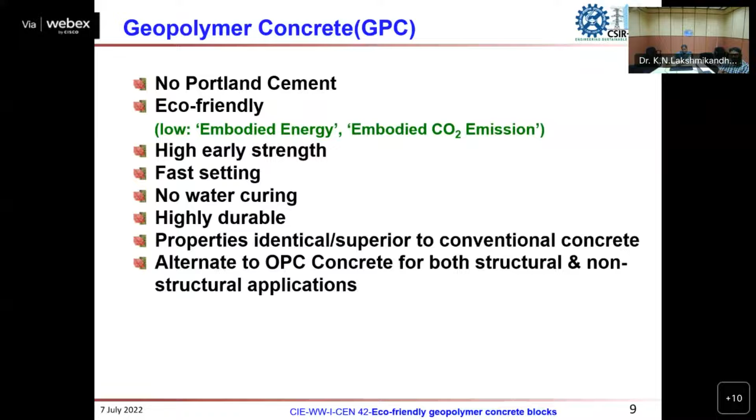When we talk about the source material, depending on the type, there are a lot of factors involved. For example, when taking fly ash, there is a lot of variable nature because of the chemical and other mineral composition differences, so variation can occur due to combustion conditions, ash collection procedures, or how it is processed.

So we have to account for this variation, and accordingly formulate the mixture, then only you will achieve the target.

Recently, IS 17452 has also given some guidelines for precast products for alkali activated cement and concrete systems. That can also be utilized for the production of different types of precast products, but it is limited up to M40 grade of concrete.

I am just going to give a brief overview of previous work done on a factory scale demonstration for block production. It was carried out in the year 2008 at Ions Construction Private Limited, Chennai, and the source material mainly utilized was fly ash, GGBS, sodium hydroxide flakes, and sodium silicate solution.

Sodium hydroxide is available in different forms like flakes, pellets, and also in the lye solution form. Sodium silicate is available in powder as well as in solution form.

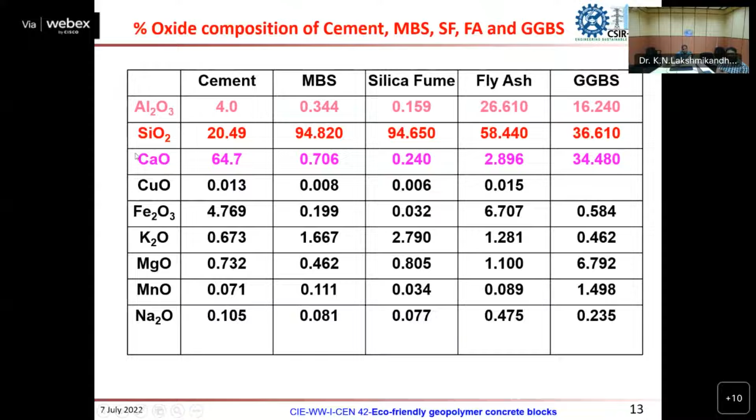When you talk about any source material, proper characterization is required, because we have to see what elemental composition is present in the different binder source materials we are using. Accordingly, we look at silica and alumina. But when CaO is present, a different reaction also happens - calcium silicate hydrate based additional reaction will occur.

If you look at silica fume and MBS, which is micronized biomass silica - it's a rice husk ash, grinded version, having a particle size of less than 25 microns. Both have high silica content, around 90 to 95%. But when you look at fineness, it is different. So we have to see all these properties when formulating the mixes. Even though the particle size changes, specific gravity also changes. So all these factors we have to look at carefully.

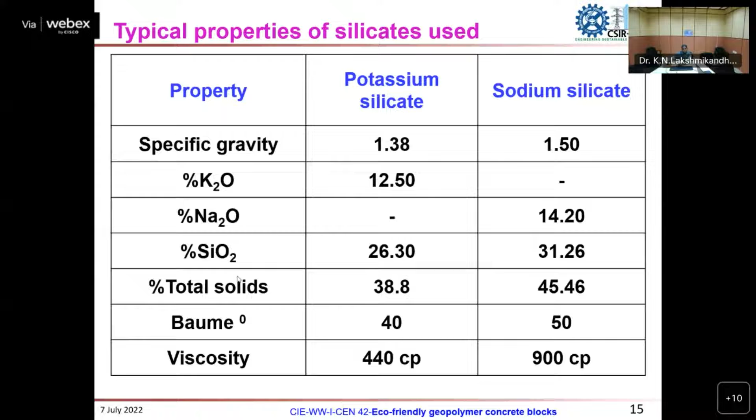When talking about the silicates used, commonly we use sodium or potassium based silicate. The main thing to see is the Na2O and SiO2 content, and generally we go for about 0.6 to 2 ratio. Also, regarding viscosity, when going for hydroxide solutions of about 10 molar when preparing, it affects the workability. There are some issues, but it seems more workable - potassium based systems are more workable.

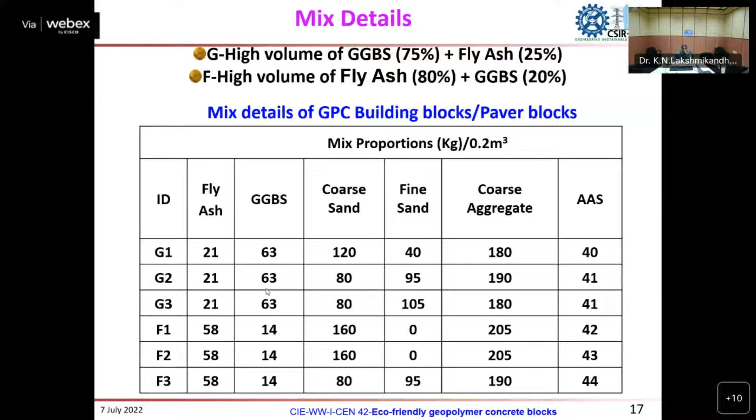In the factory scale, we have used fine sand, coarse sand, as well as some hollow bricks, and lightweight aggregate, fly ash based lightweight aggregate also. Some blocks have been produced other than the normal solid blocks and solid paver blocks and building blocks. There are two different high volume fly ash and GGBS based mixes we arrived at in the laboratory after several trials, and different grades of concrete have been developed. This is a production view of the hollow blocks and solid blocks and stacking for ambient curing.

All the characterization or properties have been done with respect to the IS code for cement-based systems, which we utilized at that time. There are about 1,200 blocks we produced for one trial batch, consisting of solid blocks and hollow blocks, and these are the properties. There are different paver blocks suiting different traffic conditions, M30 to M50, that have been developed, and the standard deviation is given here for the building blocks and paver blocks.

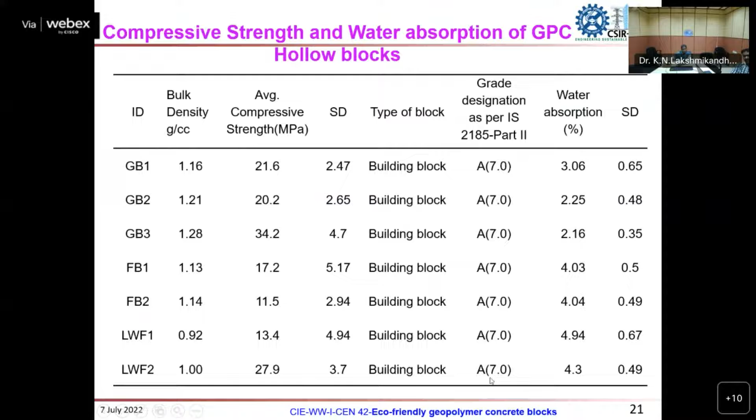The building blocks use IS 2185 part 1 and part 2, and this shows the abrasion resistance for the paver blocks.

It is produced. To show how these ecological parameters differ between conventional concrete and geopolymer concrete - from the literature, data is available for the embodied energy, and the embodied energy is nothing but the total energy right from extraction and processing and production of the total energy required for the product to develop. For example, for Portland cement, it's right from the source material, then the transportation and the process - every process has an embodied energy.

Similarly, for CO2, this value has been taken, and some calculation for M40 grade is made. Why I chose M40 grade is because in our studies it is seen that M40 and above, there is cost saving involved even in the concrete production itself - that means material only comes into picture there. It is coming slightly comparable - the cost wise it is comparable, but the main thing is the embodied energy and CO2.

There is a remarkable reduction in embodied energy and CO2 observed for the geopolymer based systems. So for M40, having 55 MPa for GPC and 52 MPa for OPC, these are the two quantities we have taken for comparison.

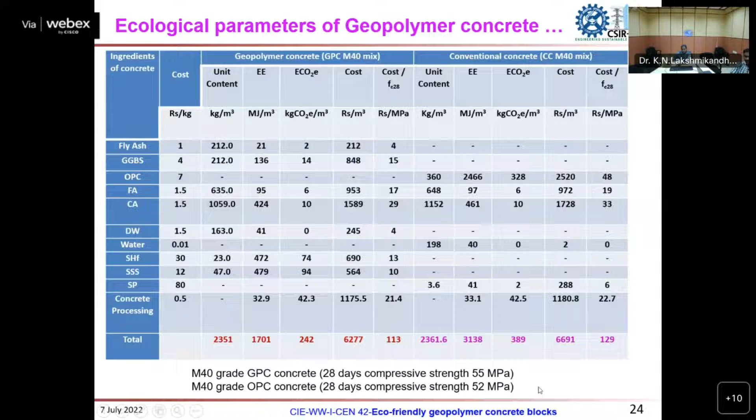Geopolymer blocks, which we have developed, have been used for one of the demonstrations for the KV CLRI building. There are totally 4 technologies that have been transferred to different industries. This is a user-friendly technology, because whatever materials are available at hand, we can utilize that - for example, fly ash, GGBS, metakaolin - any silica and alumina rich source material or its combination can be used.

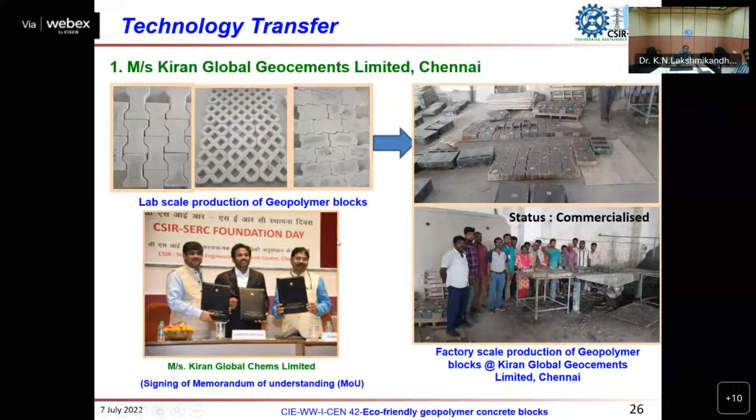The industry or customer requirement is different in each case. This one is a leading silicate manufacturer in Chennai, also into geopolymer production, but they were facing some difficulties during production, so they approached us. We produced geopolymer pavers and building blocks and demonstrated them at their factory - it was a successful demonstration. For them, the advantage is huge, since they produce silicate, their raw material cost comes to zero as it's already available with them, so that is a huge saving in their production.

There is another technology transferred to KPS Industries, Erode. Here the specific requirement was that since it's a Sipcot industrial area with high total solid percentage, they were looking for a technology requiring less water for curing and other purposes. So they came across the geopolymer technology, approached us, and we developed and transferred the technology.

The third one, Wasavi Conduit Solution, is in Kurnool - again a specific requirement. This concerned person is a chartered accountant who had jasmine farms nearby some thermal power stations. Fly ash dust from the thermal plant was flying and affecting the jasmine flowers, so he was looking for a solution. He thought, since fly ash is available nearby, he wanted to convert some area into block production utilization. He approached us, developed 10 acres of land, and now the plant is established.

He wanted lightweight geopolymer blocks, which we confirmed through laboratory trials using lightweight materials. We have developed and completed all the laboratory trials. Now we have to go for a demonstration, but due to COVID there was some delay in the plant setup.

Coming to the fourth one, we recently signed an MOU with Debris Conduit Labs Private Limited, Chennai, IIT Research Park. The specific requirement here is lightweight structure - for example, prefabricated structures that they want to erect in one day. So they want to make a platform using blocks that has to reach around 20 MPa in 10 to 15 hours. That's the requirement, and in one day itself they want to erect their building system - that was the specific requirement.